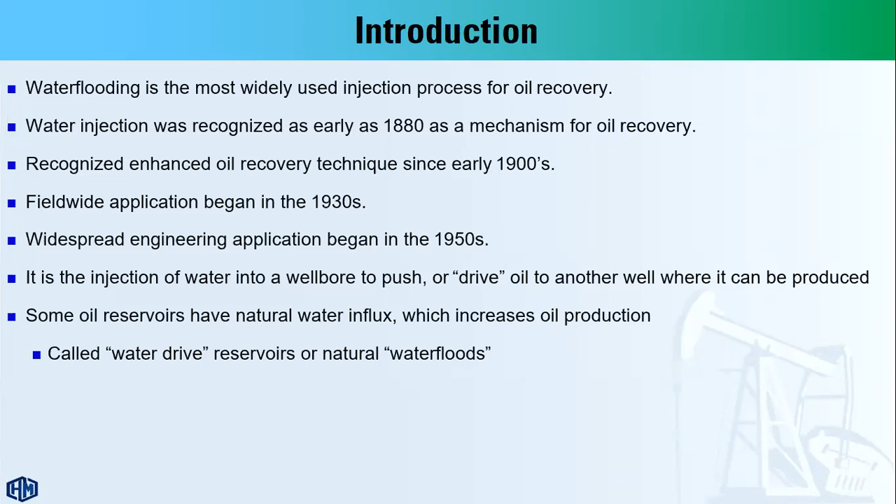At first, I'd like to highlight the difference between primary, secondary, and tertiary recovery operations. Primary recovery is typically based on natural reservoir energy, from different sources like expansion and release of solution gas, influx of aquifer water, and expansion of the gas cap. Primary recovery typically recovers up to 30% of the original oil in place, and production may occur by natural flow without any supplement in the wellbore or even artificial lift.

The secondary recovery technique is the application of the immiscible displacement process, like water injection or water flooding operation and gas injection operation. The estimated oil recovery is from 30 to 50% of the original oil in place.

The third part is tertiary recovery, or enhanced oil recovery. In this case, we have different techniques that work to change reservoir rock or fluid properties, like thermal operations - steam injection, hot water, and in situ combustion - that increase the temperature of the reservoir. Chemical enhanced oil recovery operations like surfactants work to reduce the oil-water interfacial tension. Polymer flooding aims to control the mobility of the injected water. We also have miscible displacement like CO2 injection operation, and additionally microbial enhanced oil recovery operations.

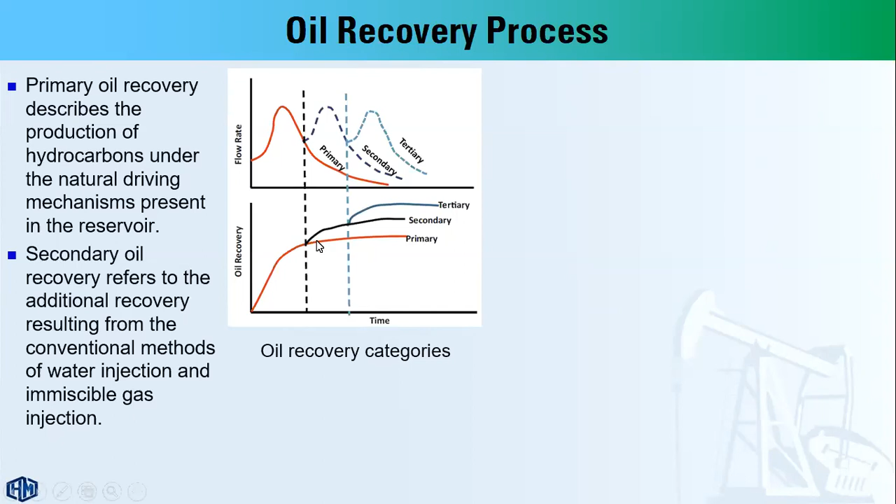As you can see, the oil recovery versus time has added value due to secondary and tertiary recovery. In terms of oil viscosity, for light oil we have up to 25% of the original oil in place that can be recovered by primary oil recovery techniques.

Up to 30% can be recovered by secondary recovery, and the remainder can be recovered by enhanced oil recovery operations. On the other hand, for heavy oil, we have only up to 5% of the original oil in place recovered by primary recovery operations, without any support from external sources to support the reservoir pressure.

For secondary recovery, we have an additional 5% of the original oil in place, while about 90% of the original oil in place can be recovered by enhanced oil recovery operations.

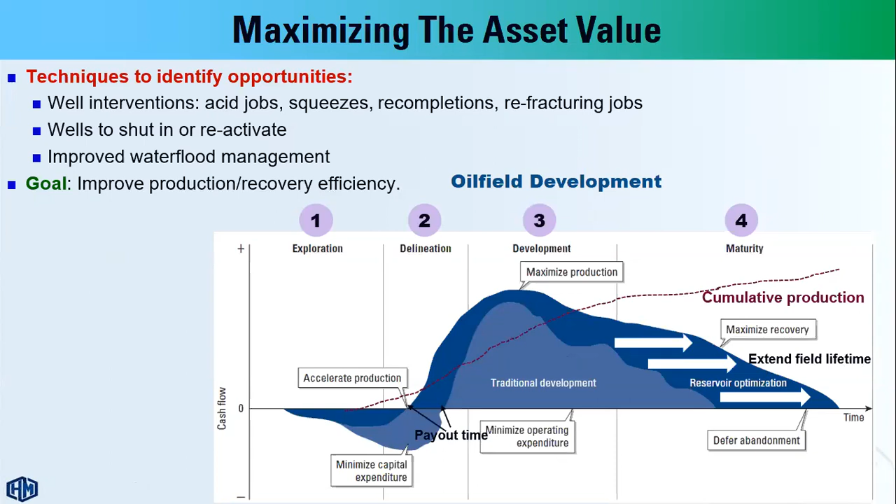After that, within the maturity phase, we have to work to extend the oil field lifetime by different reservoir optimization operations, like water injection or water flood operations.

After that, the water is diverted to water treatment. Within water treatment, for very high volumes of water, the water may be diverted to water disposal or water injection. So water is available throughout the entire oil field lifetime and entire oil field operations and cycle.

We have water during production. Within the subsurface reservoir, the oil is swept and displaced by water, maybe naturally, like water aquifers, or artificially, like water injection.

At specific levels, water may present a problem at surface with higher volumes of water produced with oil. In this case, the surface water treatment system may be overloaded. The water may be subject to water disposal and water injection after proper and specific water treatment on the surface facilities.

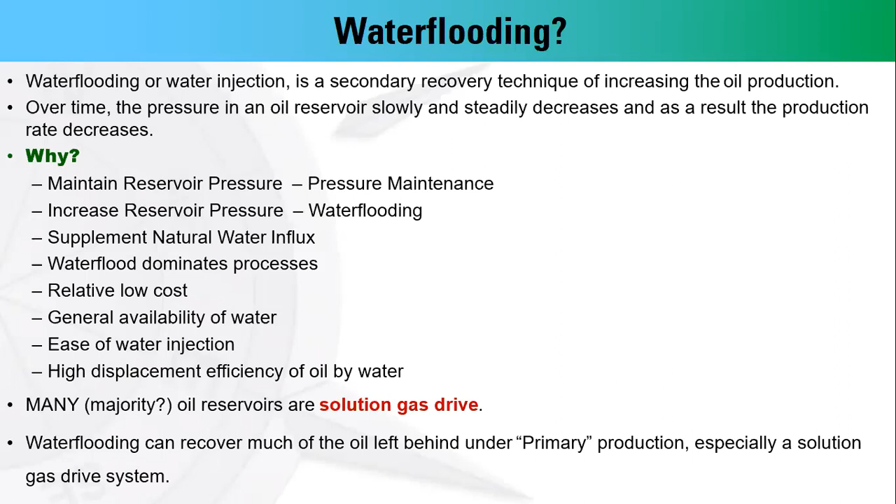One of the main reasons for the dominant application of water injection is the availability of water, the relatively low cost of water injection compared to other techniques like chemical or enhanced oil recovery techniques, the ease of water injection, and the high displacement efficiency that can be achieved by water injection.

Typically, the main objective of water flooding is to support the average reservoir pressure as a pressure maintenance operation, and to displace or push the remaining oil towards the oil production wells. And one of the very important reasons for water flood is...

...to eliminate gas releasing out of the liquid, because once the average reservoir pressure declines below the saturation pressure or bubble point pressure, the solution gas will start to release out of the liquid phase. In this case, the gas saturation in the pore spaces starts to increase.

Once the gas saturation is higher than the critical gas saturation, the gas in the pore spaces will start to move. So we will have simultaneous flow of oil and gas, two-phase flow in the porous media. So the relative permeability of oil will decrease. We have to eliminate more gas released within the porous spaces to avoid any reduction of the effective or relative permeability of oil within the porous media.

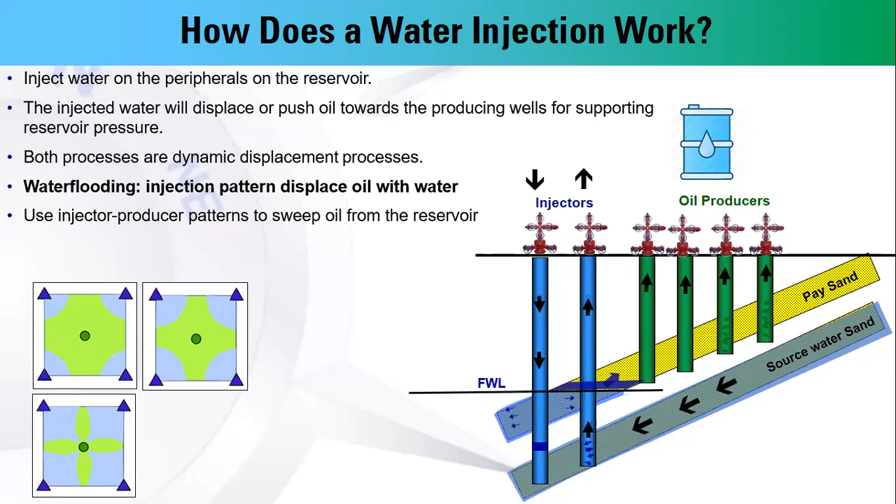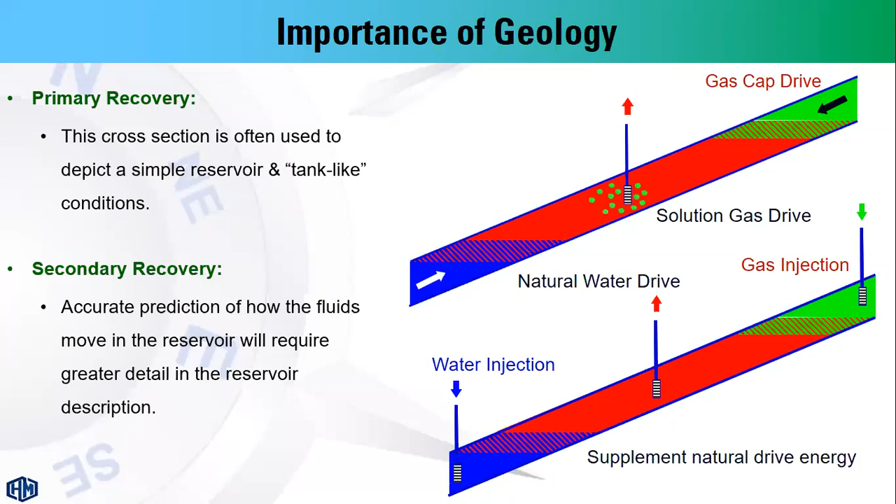However, in actual field cases, the achieved recovery factors are much less than the expected recovery factors due to different parameters like the reservoir heterogeneity, reservoir extension, other parameters like the release of solution gas, the optimization of production operations, and so on.

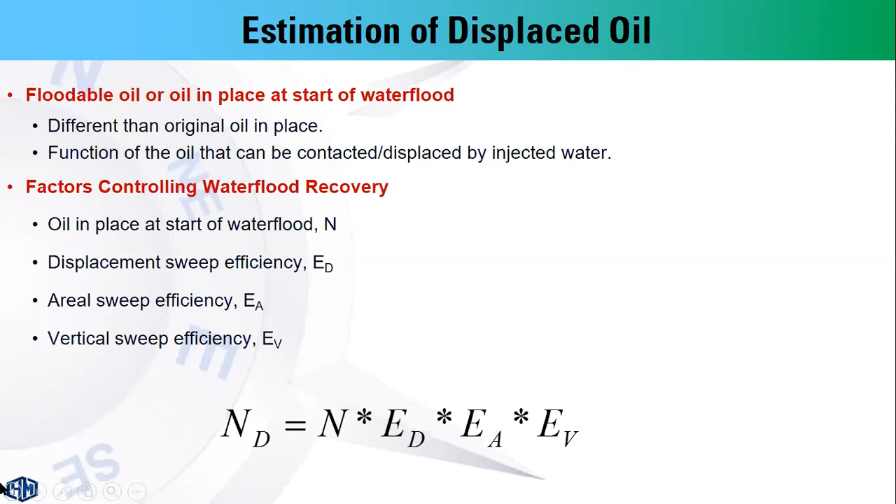So the estimation of the displaced oil, as you can see, this equation can be used to calculate how much oil in place can be recovered by displacement through water flooding operations. It's typically dependent on the original oil, the oil in place at the start of water flood, which is N, and we have three different indicators for water flood performance: the displacement sweep efficiency E sub D, areal sweep efficiency E sub A, and vertical sweep efficiency E sub V. So water injection or water flooding operation is typically dependent on the sweep efficiency and oil in place at the start of water flood.

So, very specifically, the parameters that control water flood recovery: first, the oil saturation at start of water flood, or S sub O, the residual oil saturation to water flood, how much connate water we have, free gas saturation which is a very critical parameter for water flooding operations, and water flood pore volume, which is related to the oil in place at start of water flooding.

The most important fluid properties are the viscosity of oil and water, and also the rock and fluid properties, the effective permeability to oil at the irreducible water saturation, KO at SWI, and relative permeability to water. Another important factor is reservoir stratification and permeability variation, or the Dykstra-Parsons coefficient, water flood pattern, and injection rate. Another fluid and PVT parameter is the oil formation volume factor, and finally the economic considerations.

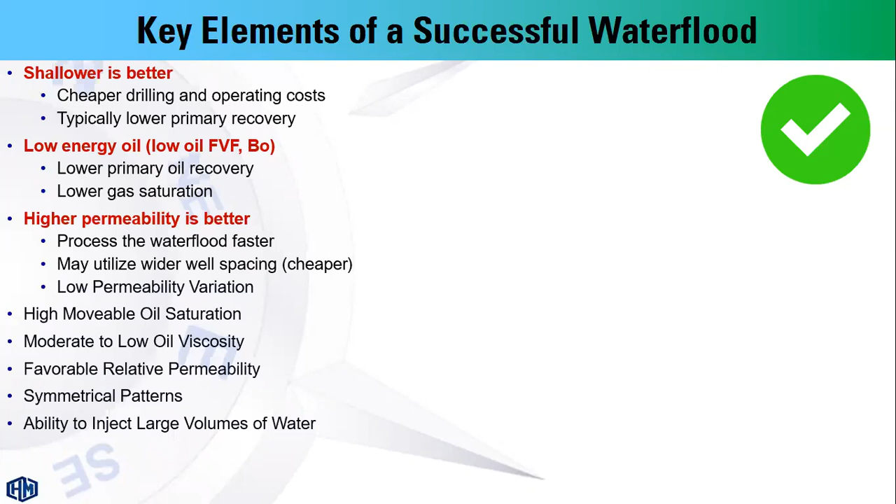High reservoir permeability is better for water flooding operations because in this case we have low permeability variations, and we may use wider well spacing, which is cheaper in terms of number of injection wells, and also moderate to low oil viscosity.

The first important aspects related to water flooding are the geological aspects. Most important is to ensure low reservoir heterogeneity, or permeability contrast, between different reservoir units or reservoir layering. Anisotropy is also a critical aspect to water flooding, related to vertical and horizontal permeability variations, typically related to the depositional environment of the subject reservoir.

Drainability, which is related to the production by primary depletion, is an indicator for the success of water flooding operations.

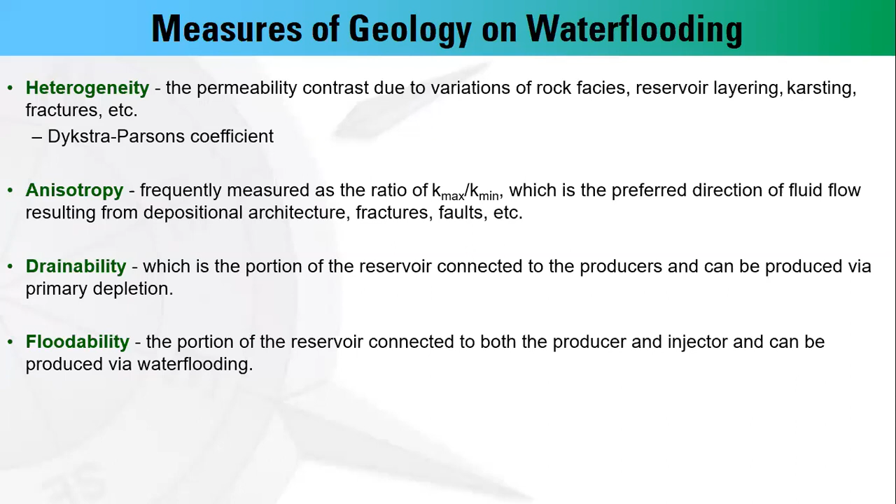To summarize, for successful water flood, we have to have a sound and good understanding of the geological models to understand the reservoir complexity and heterogeneity. Also, in this model, this is the channeling system, so you have to ensure communication between the specific channels that will have injectors or producers to control the average reservoir pressure.

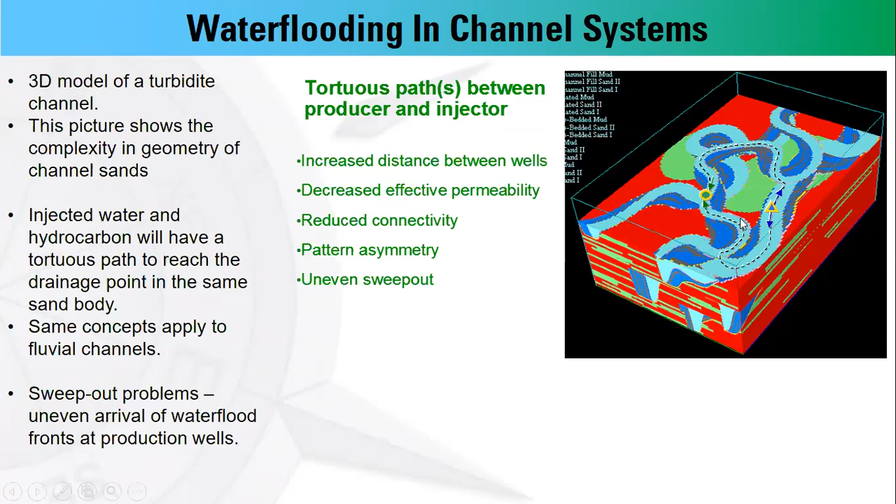Now, the important reservoir rock aspects — the most important is the relative permeability data. At the beginning, let's define the reservoir rock permeability, or absolute permeability, as defined by Darcy's law. It's a rock property related to fluid flow. The permeability is typically directional; we have the three terms of permeability in X, Y, and Z. The permeability in the vertical direction is typically less than the horizontal permeability.

The absolute permeability is defined at 100% saturation of the reservoir rock with a specific or single fluid. So the absolute or specific permeability is the ability of this rock to transmit this fluid at 100% saturation, or the fluid conductance capacity of the porous media. It's defined according to this equation in oil field units.

For the effective permeability, in this case we have more than one fluid in the pore space. So the effective permeability is the permeability to a particular fluid, in case the porous media is saturated with more than one fluid, like oil and water, or even oil, water, and gas phases. The applications of relative and effective permeability data are typically reservoir simulation and all fluid flow calculations that include multi-phase flow equations or multi-phase flow applications in the reservoir. So in this case, we have to apply the effective and relative permeability definitions.

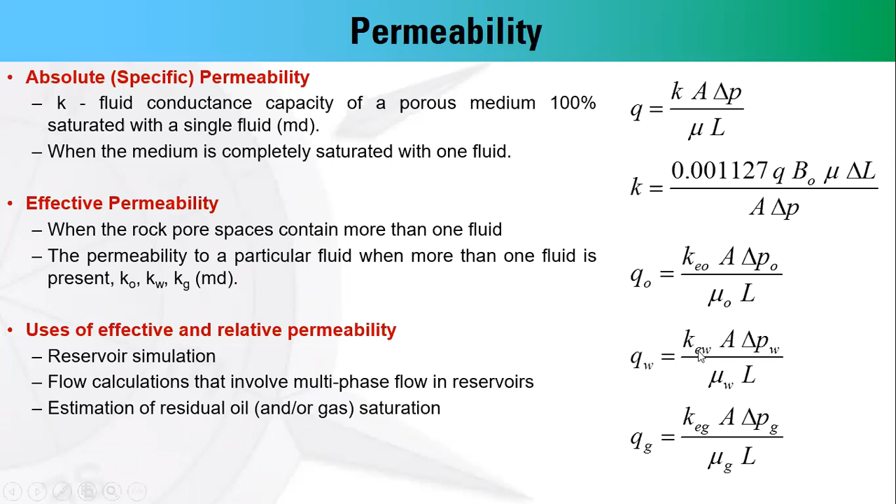So this is the definition of the effective permeability to oil, water, and gas, as defined by Darcy's law.

So relative permeability refers to cases where we have two or more fluids flowing simultaneously within the porous media at the same time. Relative permeability is defined as the ratio of the effective permeability to a particular fluid at a given saturation to a base permeability. There are two common base permeabilities: the first is the absolute or air permeability, and the second, more commonly used, is the effective non-wetting phase permeability at irreducible wetting phase saturation. In other words, it is the effective permeability of oil at irreducible water saturation, KEO, at the value of SWI.

This is the typical shape of a water-oil relative permeability curve. As water saturation increases in this direction, the relative permeability to water increases from irreducible water saturation to reach KRW at SOR. In the opposite direction, as oil saturation increases, the relative permeability to oil increases from this point to reach 100%, or one, at irreducible water saturation. This means the base permeability in this case is the effective permeability to oil at SWI, so at this point the relative permeability to oil equals 1 or 100%.

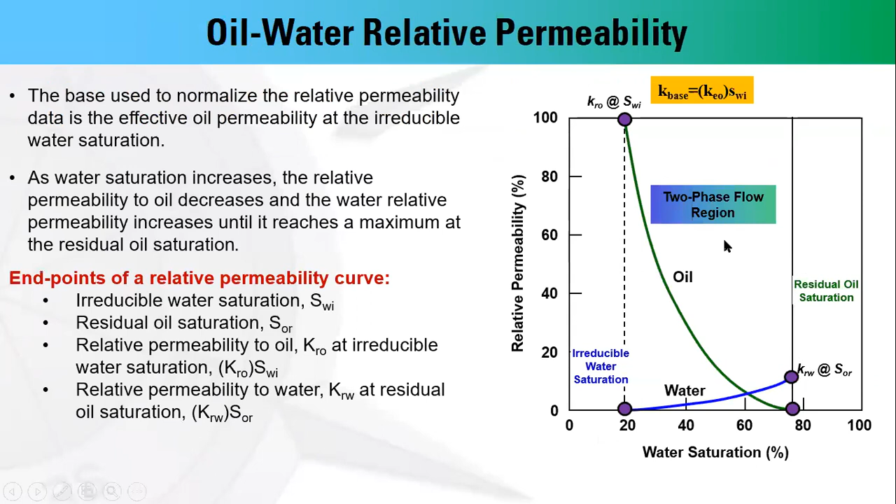You have to know that there are different endpoints for any relative permeability curve, typically four endpoints. The first is irreducible water saturation, SWI, and residual oil saturation, SOR. For relative permeability, we have relative permeability to oil at SWI and relative permeability to water at SOR. Within this region we have single phase oil flow, and within this other region we have single phase water flow, while in between we have the two-phase flow region.

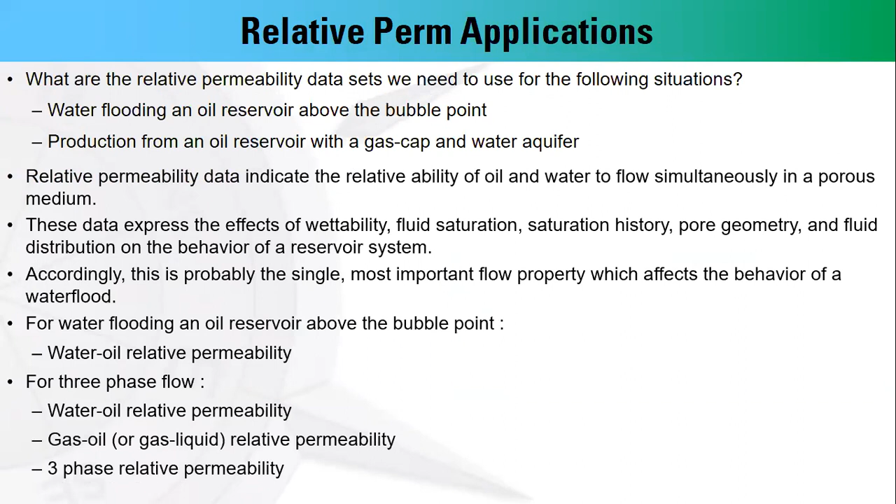Relative permeability data has applications in any multi-phase flow calculations in the reservoir, and typically for water flooding operations we have to use water-oil relative permeability curves.

The factors affecting relative and effective permeability data are fluid saturation and pore geometry, rock wettability, and fluid saturation history in terms of imbibition and drainage.

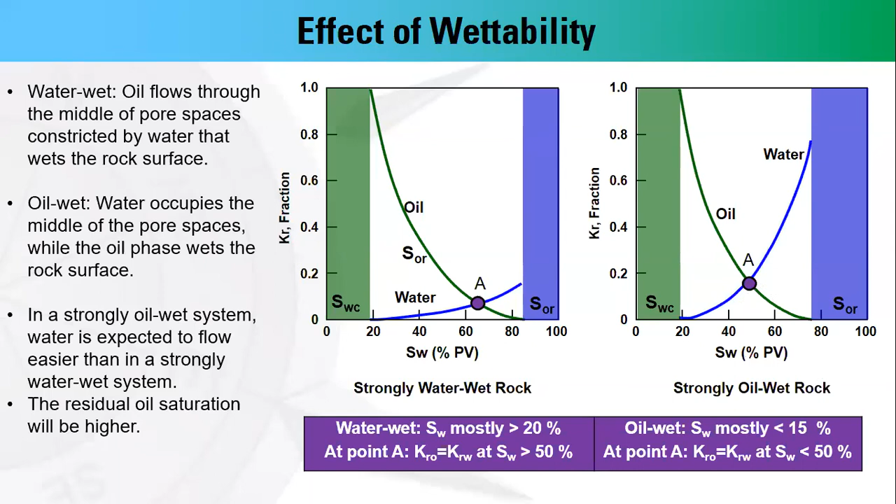For drainage, we have an increase in the non-wetting phase saturation, so the wetting phase saturation is decreasing. This is a simulation process for the migration of oil through a gas cap into the reservoir. As you know, all reservoirs are initially saturated with 100% water, so during migration, the oil or gas will displace the water to form a drainage process.

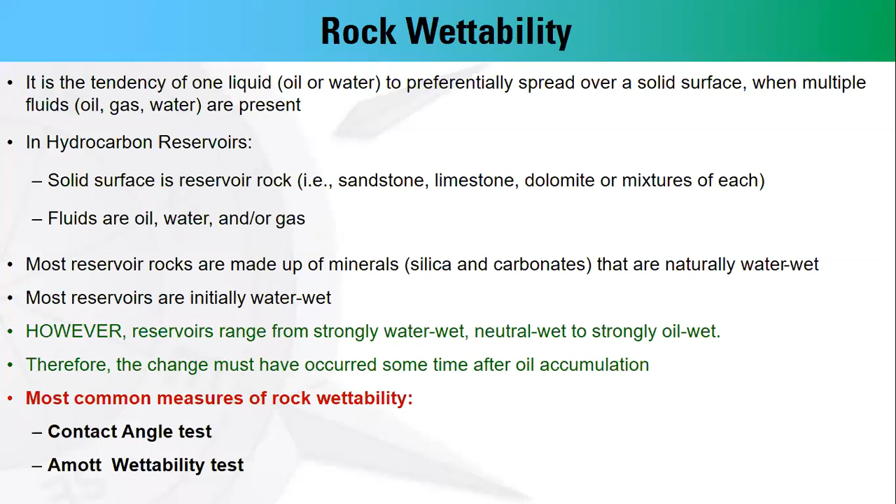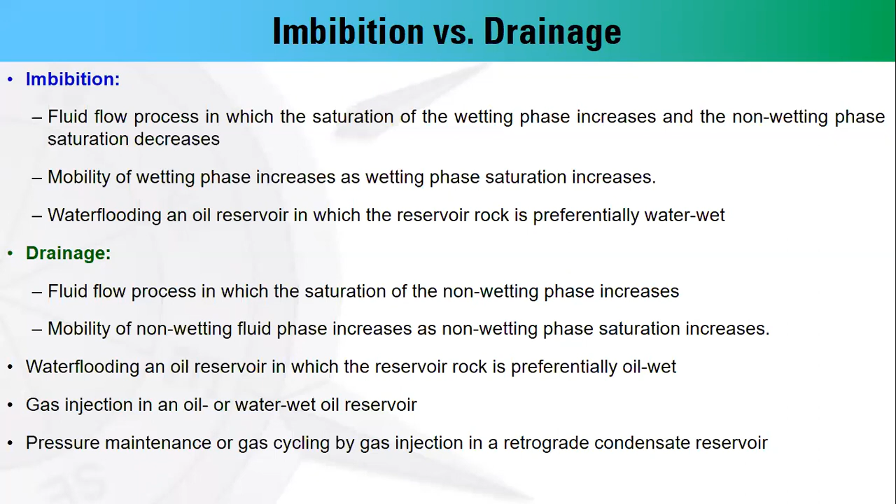As mentioned before, we have two different techniques. We have imbibition, like water injection or water flooding operations in oil reservoirs, in case the reservoir rock is water-wet, where we have an increase in the wetting phase saturation, or increase in water saturation. On the other hand, the drainage process is the increase in the non-wetting phase saturation, like gas injection in an oil or water-wet oil reservoir.

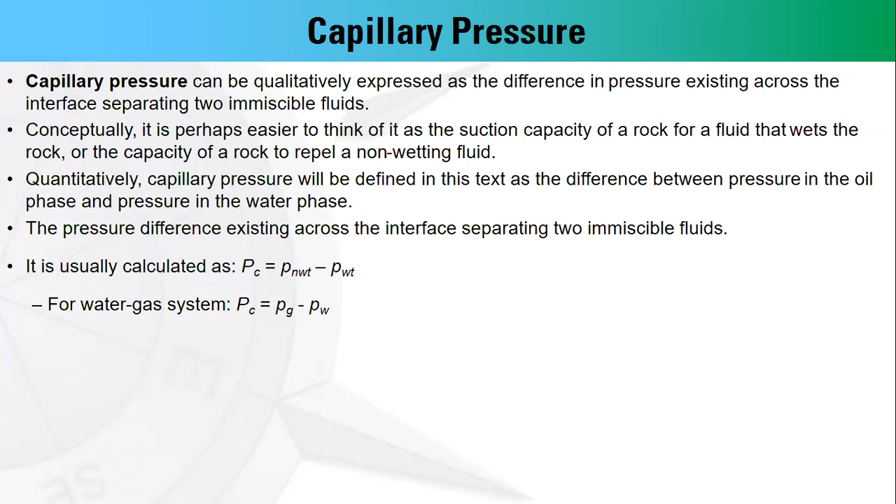The last important rock property is the capillary pressure. The capillary pressure is the pressure difference existing across the interface separating two immiscible fluids, like water and oil. By definition, the capillary pressure is the pressure in the non-wetting phase minus the pressure in the wetting phase.

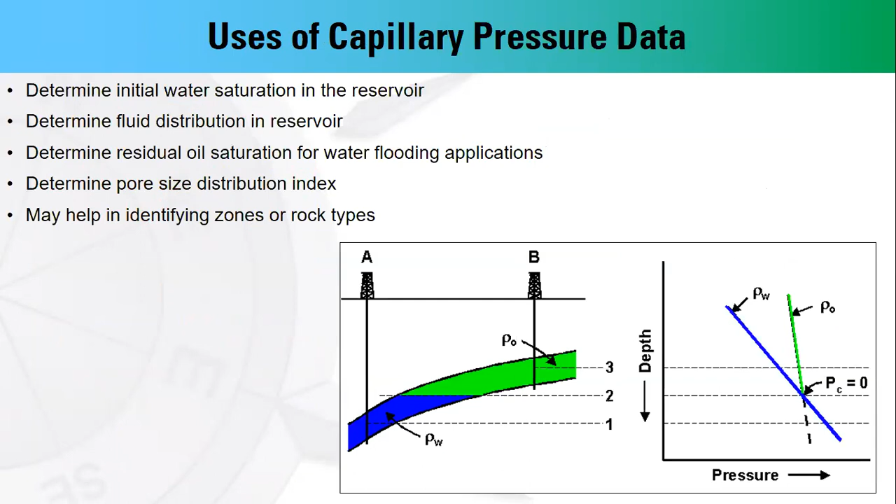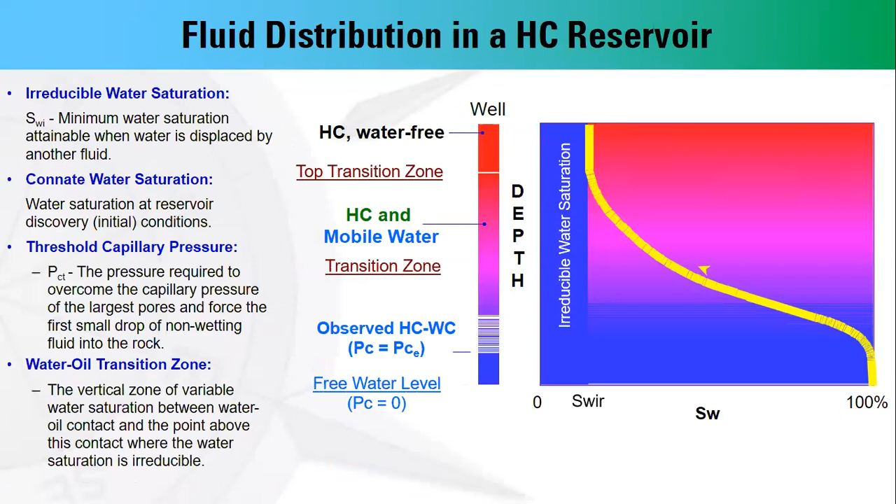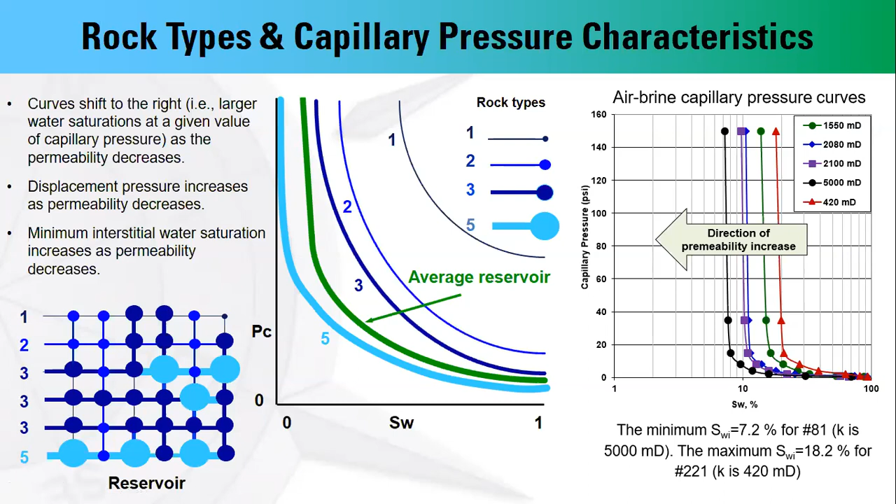So for averaging the capillary pressure data, we have a very important technique, the Leverett J function. J function is typically a technique to develop a universal capillary pressure curve. It's a dimensionless function that relates the capillary pressure with reservoir rock and fluid properties. This is the definition of the J function: it's related to the capillary pressure, porosity and permeability, and the interfacial tension and contact angle between the fluid and rock surface.

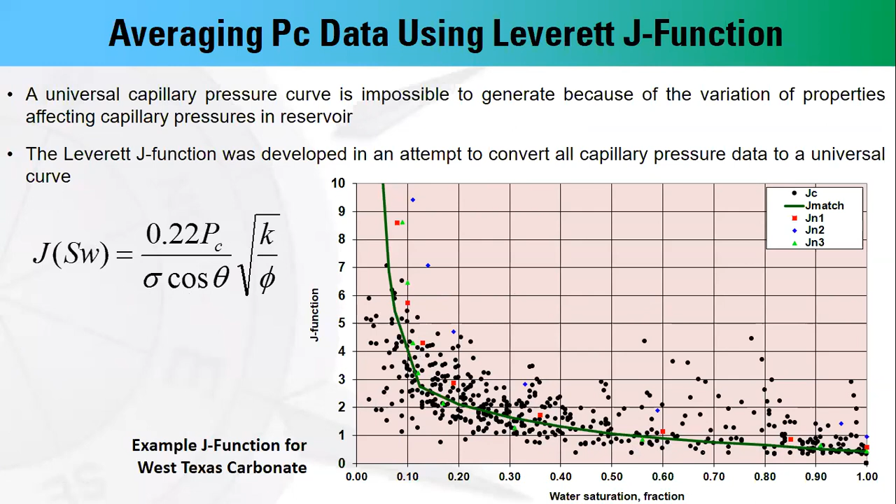Just as a summary for capillarity and wettability effects: capillarity is typically dependent on the interfacial tension between oil and water, wettability effects, and pore throat size distribution. So a larger pore throat size gives a lower capillary pressure and a smaller water-oil transition zone.

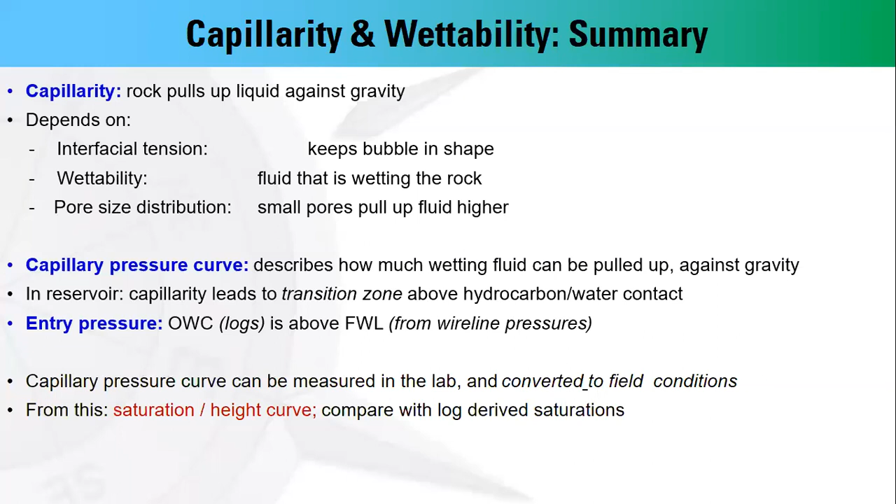Now I'd like to highlight reservoir heterogeneity. Reservoir heterogeneity is related to the distribution of reservoir properties laterally between injectors and producers. In water flooding, you have to avoid any structural elements like sealing faults between the injector and producer. So if we consider water injection from this well in layer 5 and layer 6, the oil producer will not be affected by the injected water because we have this sealing fault between them.

So for efficient water flooding operation, you have to ensure there are no structural elements, and ensure good lateral distribution of the reservoir between injectors and producers.

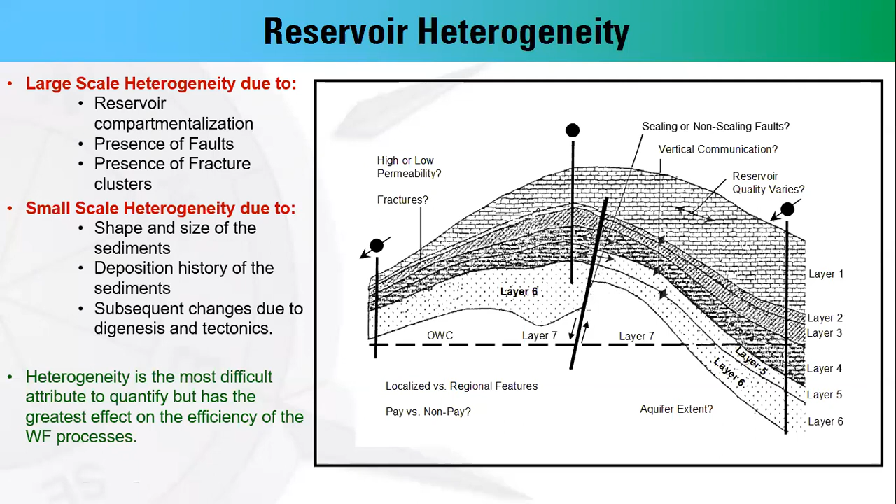So in the layer, there is a variation or heterogeneity between layers. So we have two different techniques to identify the permeability variations. The important one is the Dykstra-Parsons coefficient, used to identify the permeability variation before designing a water flooding operation. And the second is the Lorenz coefficient of heterogeneity.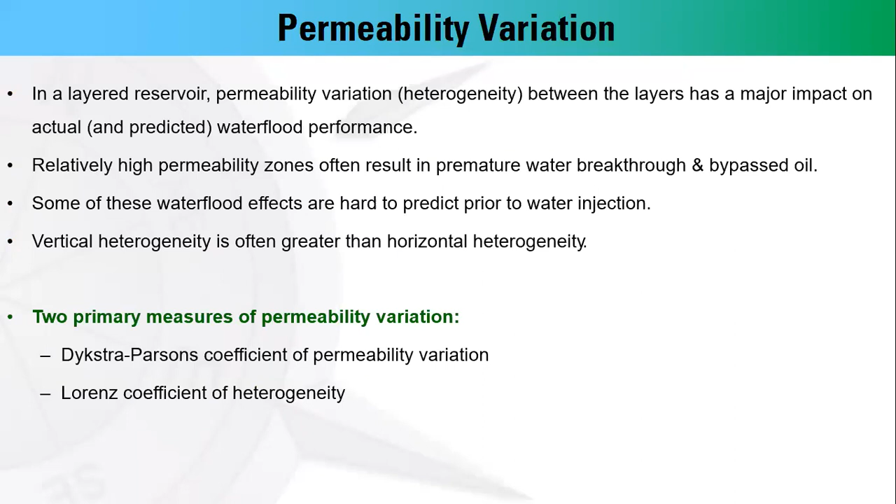I will highlight very quickly the Dykstra-Parsons coefficient of permeability variation. It's defined by this equation, a function of permeability at K50 and K84.1. K50 is the median permeability value at 50% of the cumulative sample distribution. So the procedure is to sort your permeability data in decreasing manner and calculate K50 and K at 84.1% of the cumulative sample distribution.

In this case, you will find a relationship like this, and according to this relationship, we identify the permeability variation. The Dykstra-Parsons coefficient ranges from 0 to 1, or 0 to 100. A value of 0 means we have a completely uniform or homogeneous reservoir, while values at or near 1 indicate a completely heterogeneous reservoir, which is not recommended for water flooding operations.

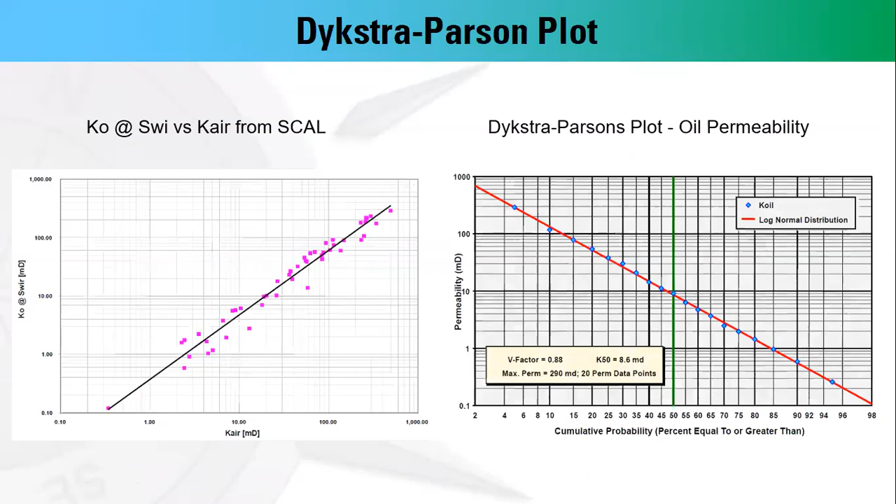Now the definitions of mobility and mobility ratio. Mobility is simply the ratio of effective permeability to the viscosity of a specific fluid. So mobility is the permeability of the rock to a specific fluid relative to the fluid viscosity.

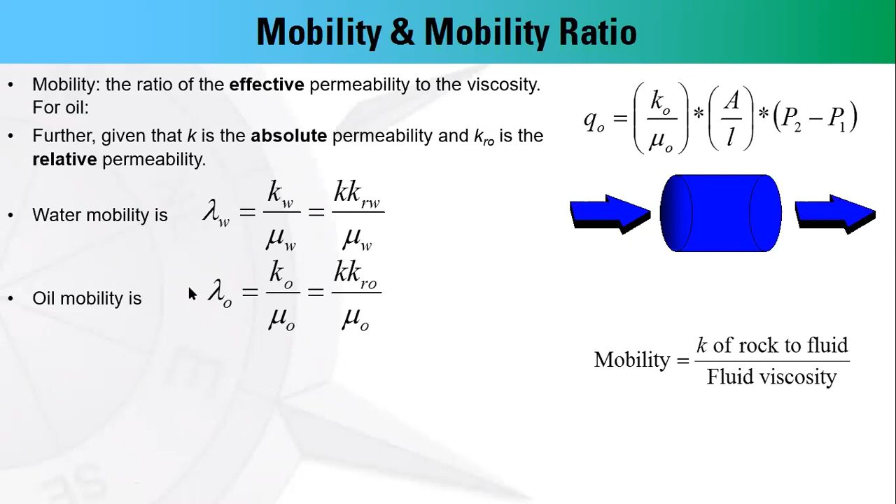Typically, we have this definition of mobility of water and oil. This is the mobility of water: the ratio of kW over mu w. In terms of effective permeability to water, it can be represented by K absolute times krw, the relative permeability to water. For oil, we have a similar definition of oil mobility.

So mobility is a very critical parameter for successful water flooding operations. We have to ensure we have lower water mobility and higher oil mobility.

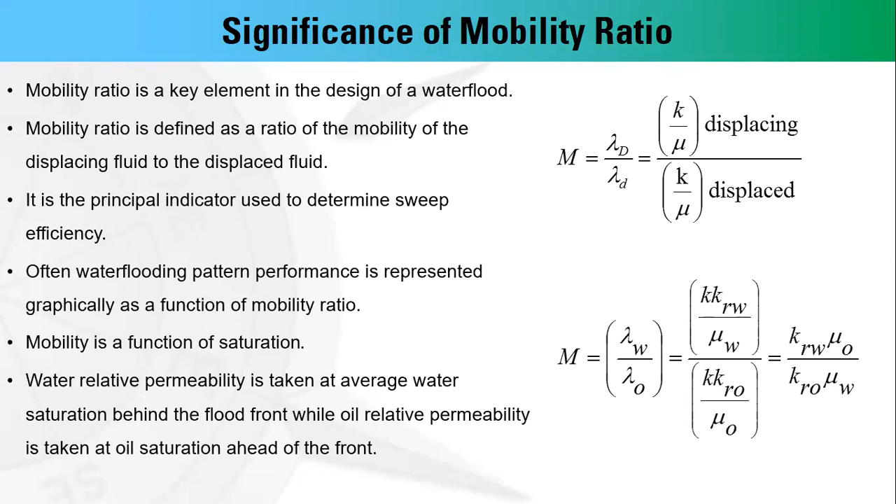The second important definition is the mobility ratio, simply the ratio of mobility of the displacing phase to the displaced fluid, or the mobility of water to mobility of oil. It follows this definition. For water flooding, it's important to keep the mobility ratio less than 1 to ensure efficient water flood and higher oil recovery.

For mobility ratio higher than 1, we have an unfavorable mobility ratio. In this case, the water will move more easily in the reservoir relative to oil, which is not recommended in water flooding operations. In this case, we may apply polymer flooding operations to control the mobility of water, while for mobility ratio less than 1, which is a favorable mobility ratio, the oil will flow more easily than the formation water. This is highly recommended in water flooding operations to ensure maximum oil recovery and delay water breakthrough.

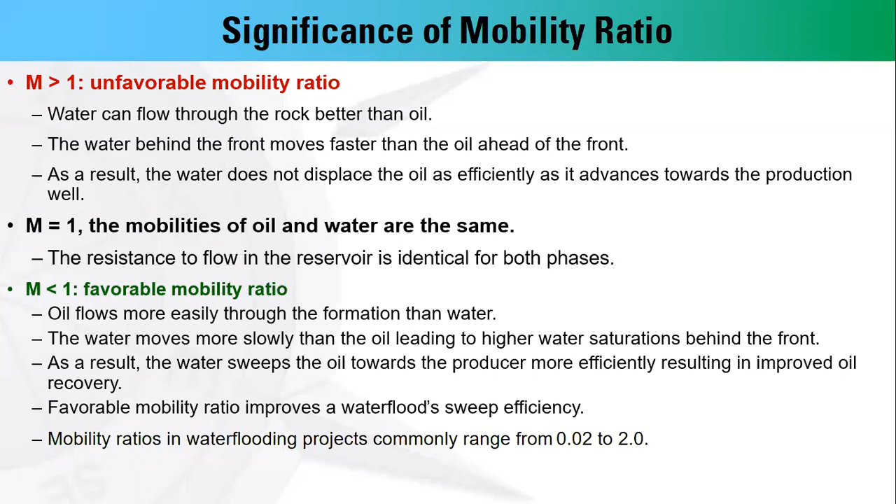For the recovery process, typically in field operations, we have 5 different reservoir driving mechanisms: solution gas drive, gas cap drive, water drive, combination drive, and gravity drainage. We have different sources of reservoir energy, like expansion and release of solution gas, expansion of gas cap gas, influx of aquifer water, and even gravity effects on recovery.

So the optimum solution is to combine depletion with displacement, like combining solution gas drive with water injection. In water injection, we have two different scenarios: pattern flood and down-dip peripheral injection.

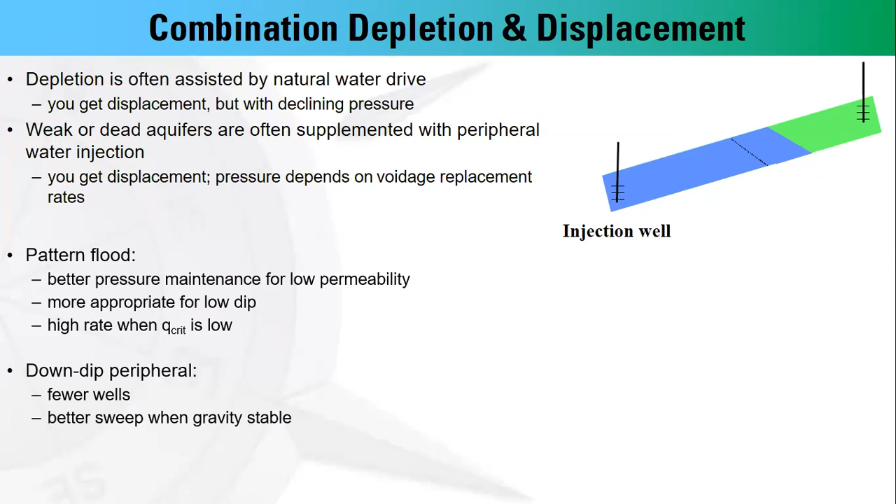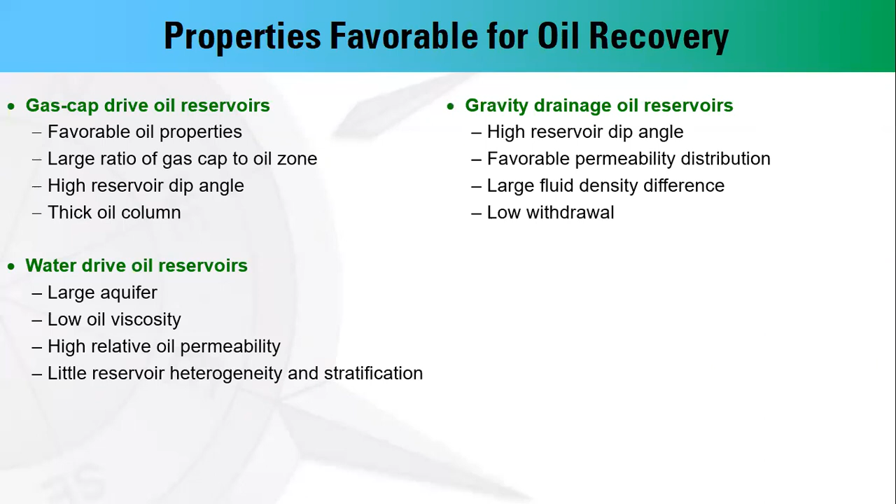The favorable condition for maximum oil recovery in gas cap drive reservoirs is a large ratio of gas cap to oil zone, or a large gas cap size. For water drive, a large or strong aquifer is preferred to maximize oil recovery; in this case, water flood operations may be neglected due to higher reservoir energy. For gravity drainage, high dipping in the reservoir is favorable, and a large density difference between oil and water is also recommended to maximize recovery by gravity drainage.

So the common negative factors related to water flood include low production rates related to low reservoir pressure or energy, and poor hydraulic conductivity, which also affects injection. Another negative issue is early water breakthrough, related to high permeability contrast between reservoir layers. Also, corrosion, scaling, and plugging problems related to water injection operations are among the negative issues related to water flood.

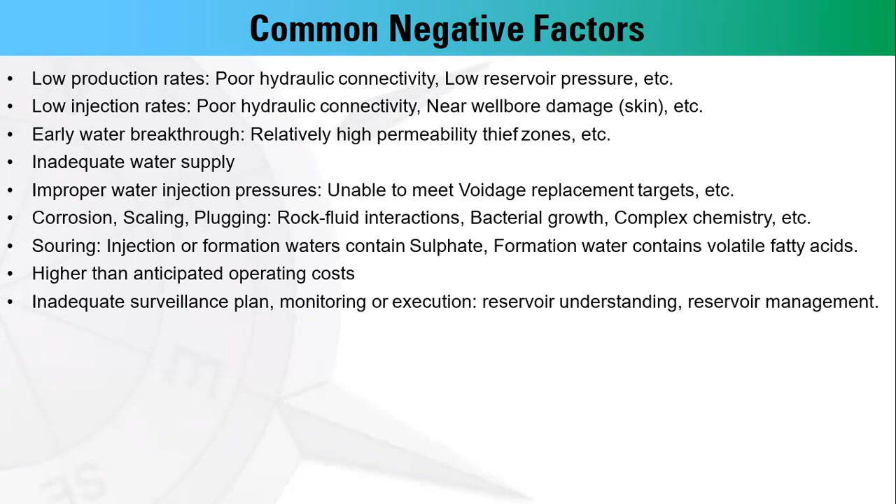So, however, we have different negative issues of water flood. The water flood is the most widely used secondary recovery technique.

Now, I will highlight the definition of the voidage replacement. The voidage replacement or voidage replacement ratio is the ratio of injection to production for a specific pattern or even throughout the field wide.

The reservoir voidage is the summation of reservoir oil, water and gas production calculated at reservoir conditions. In this case, we have to consider the free gas production if the average reservoir pressure is

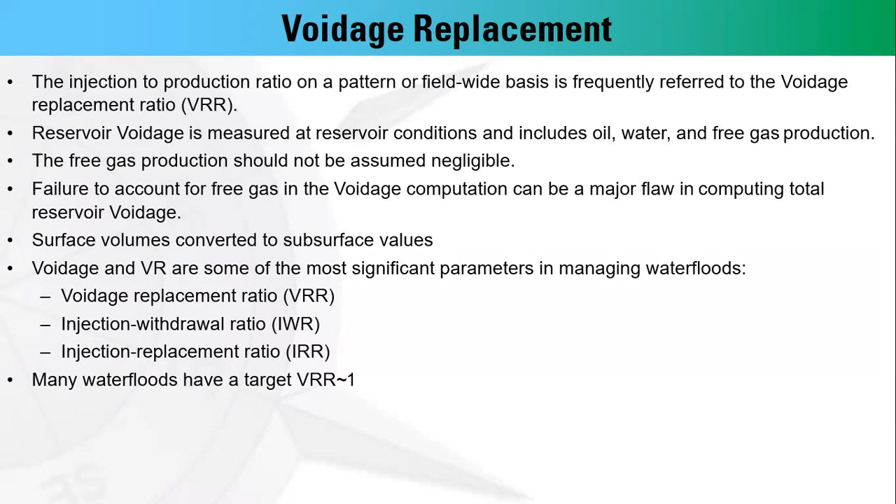lower than the saturation or bubble point pressure. So the voidage replacement ratio is the summation of water injection, or even water influx, divided by the reservoir voidage. The reservoir voidage is defined by this equation: oil plus water plus free gas production converted to reservoir conditions by multiplying by the formation volume factor of oil, water and gas.

So the voidage replacement ratio is the ratio of the total water injection to the total reservoir voidage. In successful water flooding operations, it's important to keep the voidage replacement ratio higher than 1 to keep the average reservoir pressure more or less constant, while for a voidage replacement ratio lower than 1,

in this case the reservoir pressure will steadily decline due to depletion in the average reservoir pressure.

Typically, we have different reasons for pressure losses during water injection due to reservoir heterogeneity, due to solution gas or free gas fill up, poor communication between zones, poor sealing, and even leakage faults. In this case, we will have losses in the injected water.

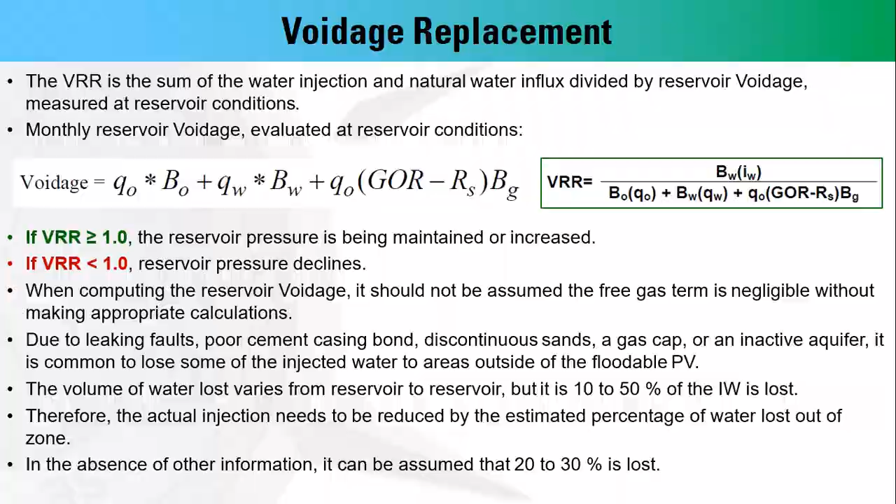And now I will highlight the immiscible displacement process in a porous media. So water flooding operation is typically an immiscible displacement process.

It's typically governed by three fundamental concepts, starting with the fractional flow equation developed by Leverett in 1941. The second one is the frontal advance equation developed by Buckley and Leverett in 1942. The tangent method of analysis of the fractional flow curve was developed by Welge in 1952.

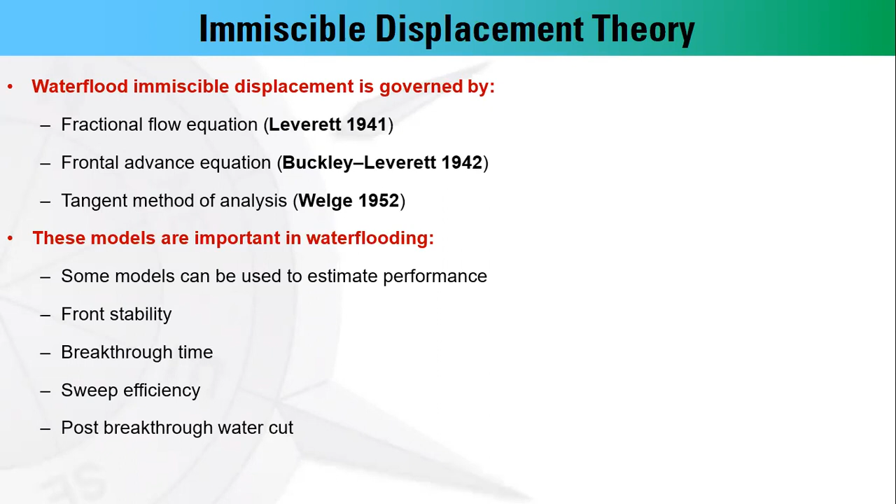So these are the fundamentals of immiscible displacement and applications of water flood. They are used to identify the front stability and breakthrough time, and even the sweep efficiency of water flooding.

So this is the definition of fractional flow. It's an important model used to identify the water fraction relative to the total flow at a particular location and time in a linear reservoir model or water flood system.

So the fractional flow, as you can see, is a function of the mobility ratio, mobility, gravity and capillary terms. The fractional flow will provide important insights related to the immiscible displacement process and the water saturation distribution within the water flooded zone.

In this equation, we have two important parameters related to the gravity term, which is a function of the dipping of your reservoir and the difference between oil specific gravity and water, or the density difference between water and oil. The second term is the capillary term, which is related to the capillary pressure effect.

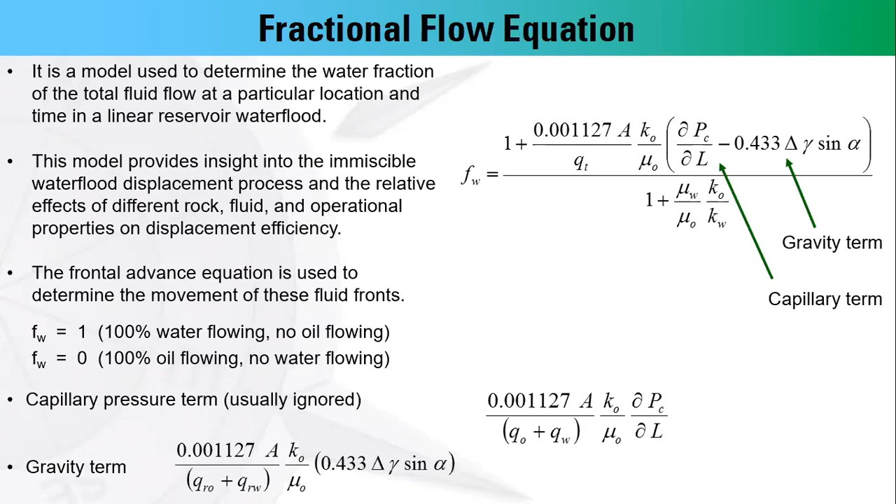Typically for fractional flow of water, if we have a higher fractional flow, in this case we have 100% water flowing in the reservoir, which means no oil flow, which is not recommended in water flooding operations, while a low fractional flow of water or low water cut means efficient water injection or water flooding operations.

So the fraction of water flowing at any point in the reservoir at point X in a linear water flood system is defined by the fractional flow like this.

In terms of the second gravity term, this is a function of the density difference between oil and water, and this form is a function of the specific gravity difference between oil and water.

So the fractional flow is typically a relationship of different fluid properties like viscosity and density, rock properties like effective permeability and saturation, total throughput rate like injection rate, pressure gradient or capillary pressure, and structural property like the dipping of the reservoir, which is the parameter alpha.

So in case we have water injection with updip, this will improve the efficiency of water flooding operation due to the gravity effects.

So this is the flow at any location in the reservoir, defined by this equation. The total reservoir flow is defined by Q oil and Q water. So the fractional flow simply equals Q water divided by Q oil plus Q water, or Q water to Q total. So the fractional flow of water is the fraction of water flowing in the reservoir relative to the total fluid flowing in the reservoir.

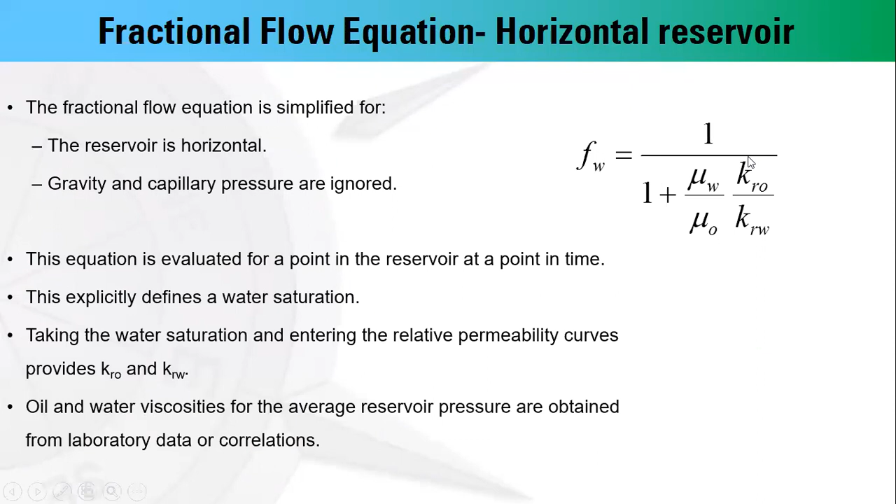This is the simplified form of the fractional flow in case we have a horizontal reservoir, so we have no dipping effect, and by ignoring the capillary and gravity forces. This is the definition of the fractional flow equation.

The different forms of the fractional flow equation can be related to the water-oil ratio according to this definition. So Q water relative to Q total is a function of the water-oil ratio at reservoir conditions. So we have different forms of the fractional flow equation.

The controls of the fractional flow: reservoir dipping is very important. So up-dipping displacement of oil by water, or up-dipping water flood, will improve the efficiency of water flood due to the gravity forces. Also, in case we have a large density difference between water and oil, that will also improve the water flood efficiency.

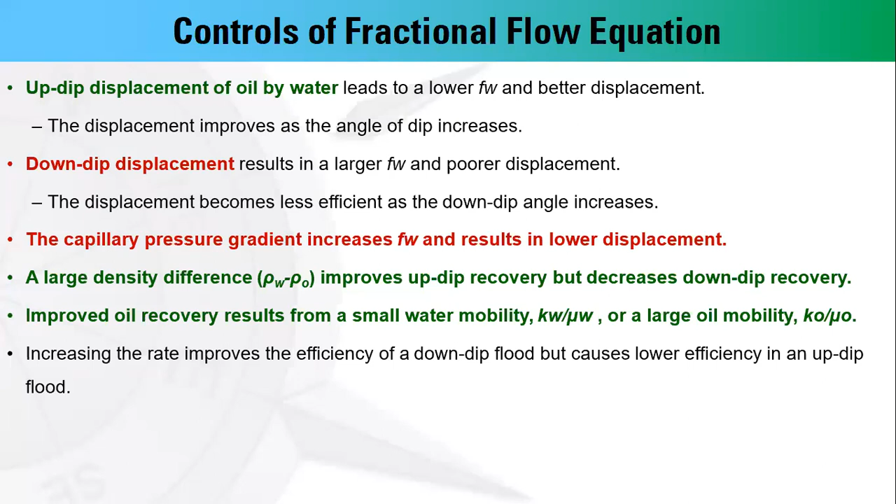Typically, the fractional flow curve is dependent on wettability, dipping, and the oil and water mobilities. With high mobility water, the fractional flow of water will be higher, which is not recommended. Also, for down-dipping displacement versus injecting up-dipping displacement, up-dipping is recommended to improve water flood efficiency and reduce the fractional flow of water.

Also, relative and effective mobility have an effect on the fractional flow, because this equation is simply a function of the relative mobility of oil and water.

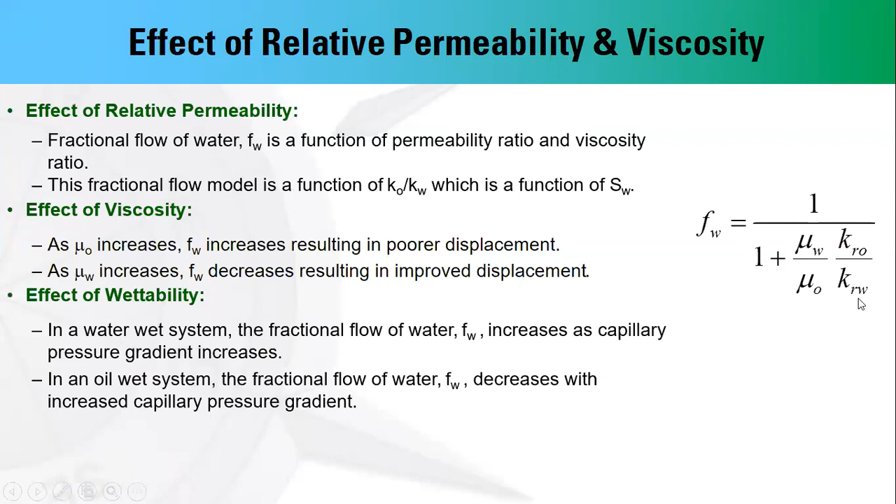The fractional flow is a function of water saturation. It's very simple, and it's related to the relative permeability data as a function of water saturation.

One assumption is that the gas saturation is zero and the connate water saturation is immobile. This is one of the widely and initially used techniques for displacement, the piston-like displacement model. It's a very ideal model.

So the oil saturation at the flood front is the difference between 1 and Swi. Behind the flood front, we have the residual oil saturation in the water-flooded zone. This model is very ideal and very simple to discuss the displacement theory.

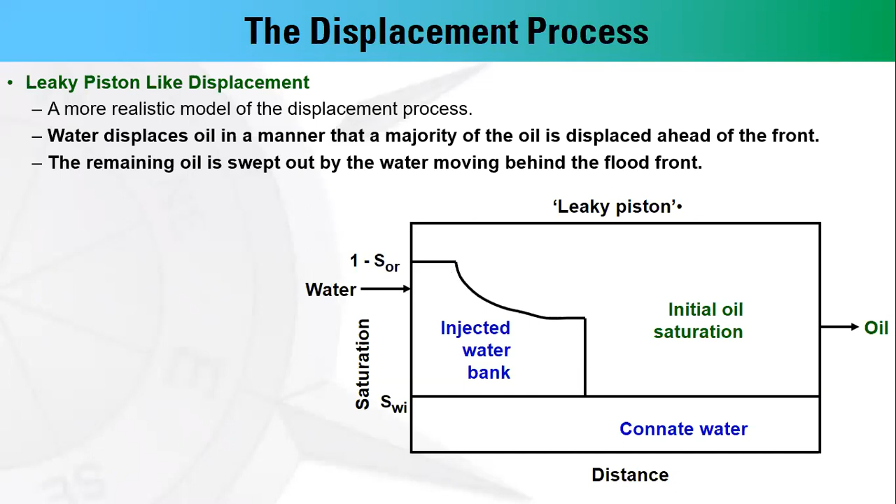It's very related to the actual injection operations. So in this case, water displaces oil in a manner related to the non-uniform water flood front, and the remaining oil is swept by the injected water moving behind the flood front.

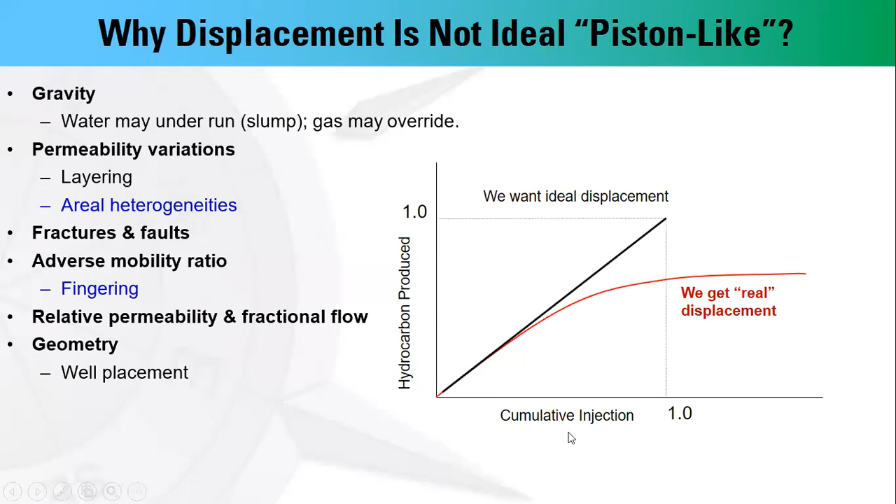So why don't we have this ideal effect? Because we have gravity effects. When we have free gas in the reservoir, permeability variations, or areal heterogeneity, we may have fingering of the lower, higher mobility water. Also, the relative permeability and the fractional flow will not be as homogeneous. So this is the ideal displacement process, while this is the actual displacement process, as a relationship between hydrocarbon recovery relative to the cumulative bulk volume of water injected.

So the next important definition is the frontal advance equation. This equation is important to identify the saturation distribution of different phases at any time during water flooding. The frontal advance equation is used to calculate the water saturation in the water-invaded zone of the linear system or the subsurface reservoir.

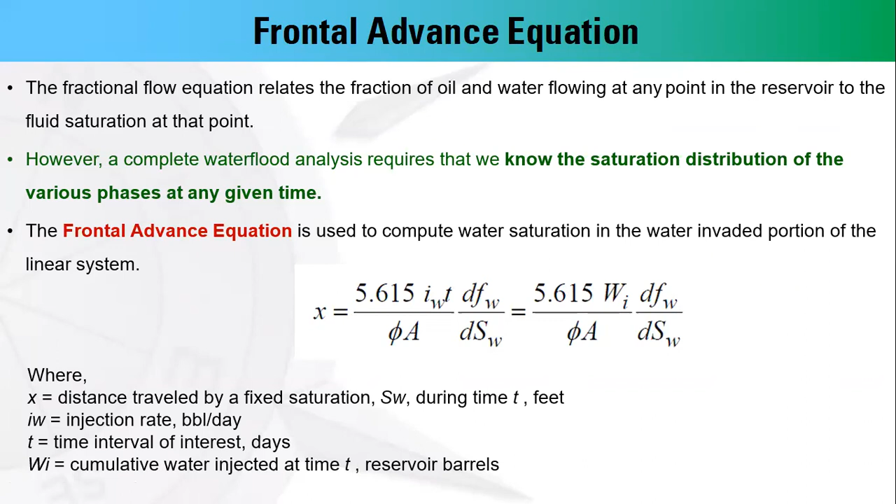This is the definition of this equation. So x is the distance from the injector. Water saturation will be calculated at time t and distance x. IW is the injection rate, T is the time interval in days from the start of water injection, and W sub I is the cumulative water injected at calculation time T. This equation is very important to identify the water saturation distribution within the linear displacement system or water flooding operations.

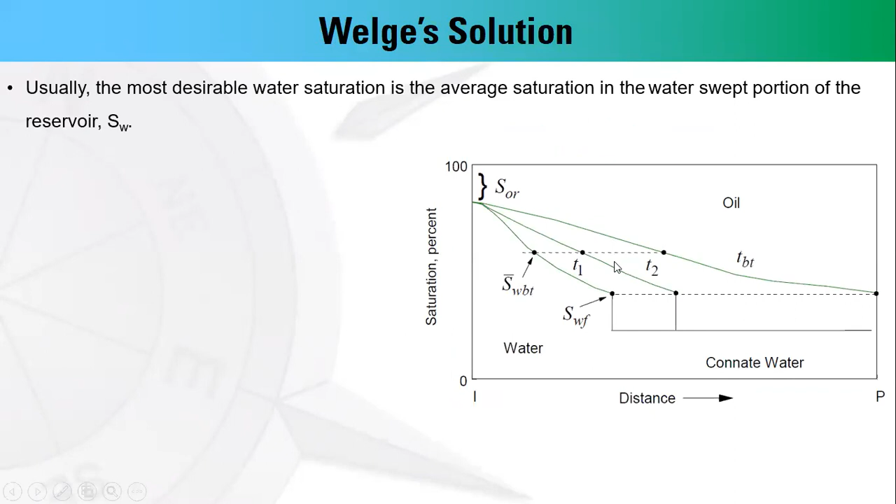So this is the typical saturation distribution for the immiscible displacement process, calculated by the frontal advance equation. At different times, as you can see, this is the shape of the saturation distribution and the location of the flood front at this time, at time one, and at time two, which is the time of breakthrough. As you can see, the flood front is located at the production well.

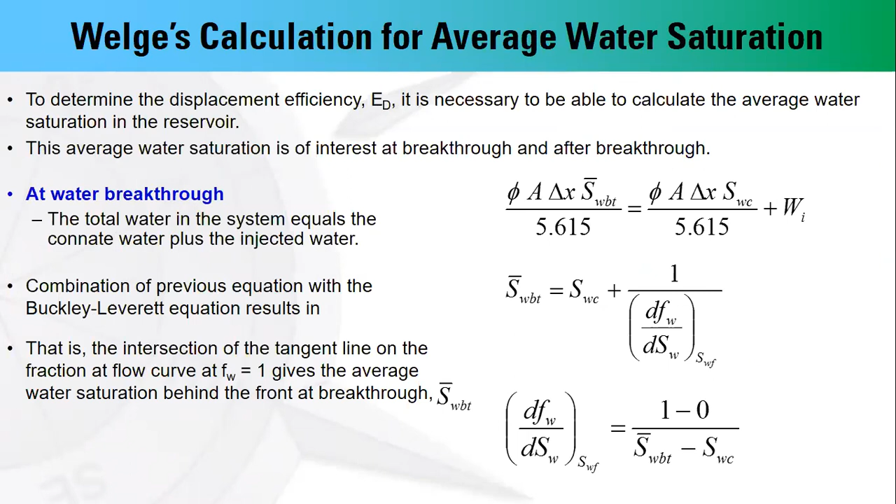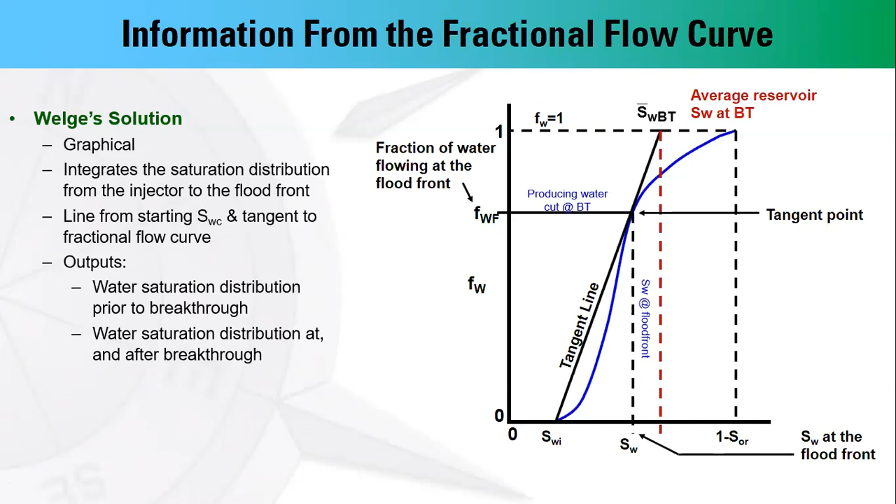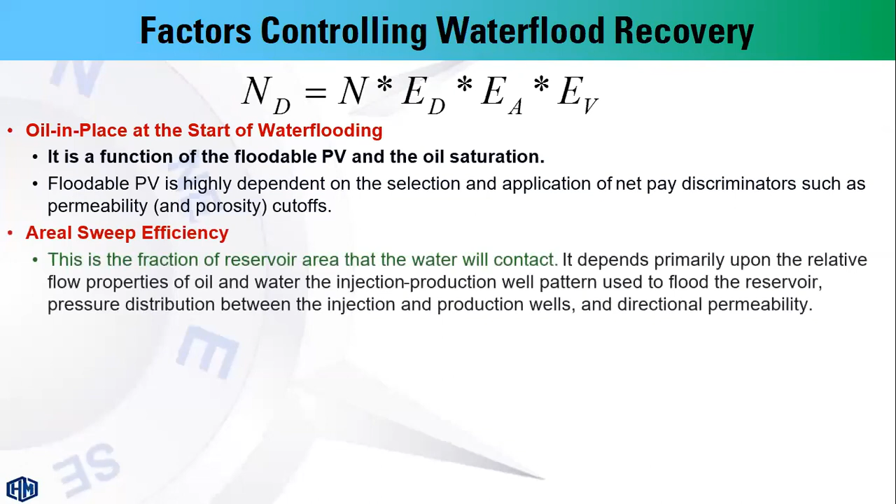Areal sweep efficiency is the fraction of reservoir area contacted by the injected water. Vertical sweep efficiency, if we consider the vertical plane between the injection and production well, so we will calculate the vertical sweep efficiency. The displacement efficiency is the fraction of oil which will be displaced by the injected water.

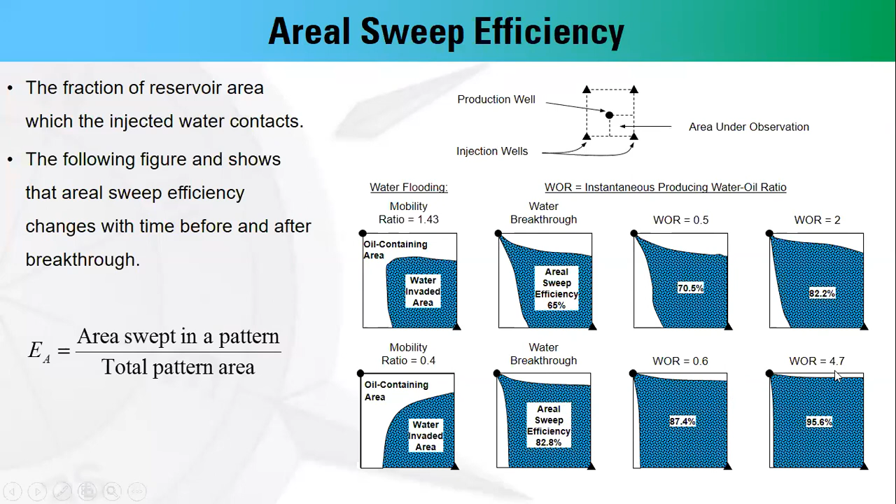For the vertical sweep efficiency, if we consider the vertical plane, the vertical sweep efficiency is the vertical cross section contacted by the injected water. Generally, the water flood efficiency is the cumulative production correlated with the oil in place at the start of water flood and the recovery efficiency of water flood. This term is the areal and vertical times displacement efficiency of the water flood.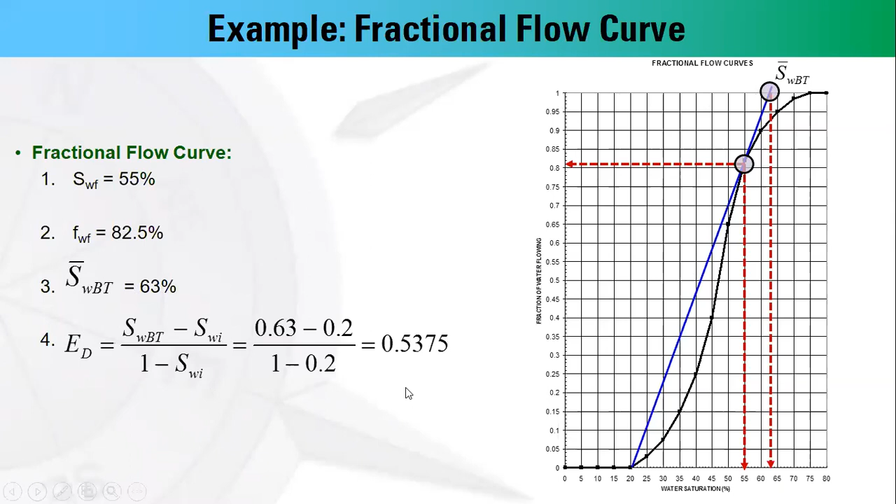In this example, the average water saturation at the flood front is 63%. So we can calculate the displacement efficiency according to this relationship, which is about 54%.

This is another example. At the end of this session, I'd like to highlight very quickly a case history of water injection operations. We have a specific field with this reservoir rock property data and the reservoir fluid data. We have a light oil reservoir.

This is the K-phi relationship, the porosity and permeability relationship. As you can see, we have 4 rock units or hydraulic units of this reservoir based on the relationship between permeability and porosity data.

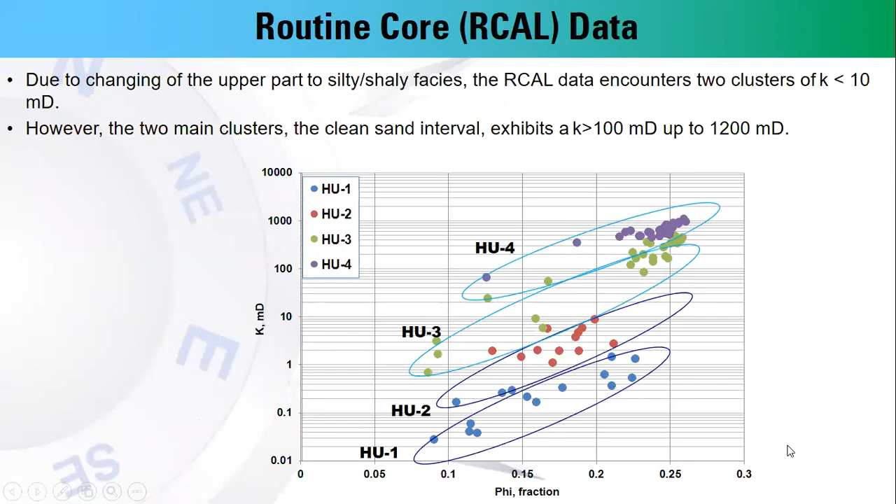The laboratory testing or screening experiments required for water flood are the capillary pressure, which is most important, permeability and wettability data, and also fluid and fluid-rock compatibility testing.

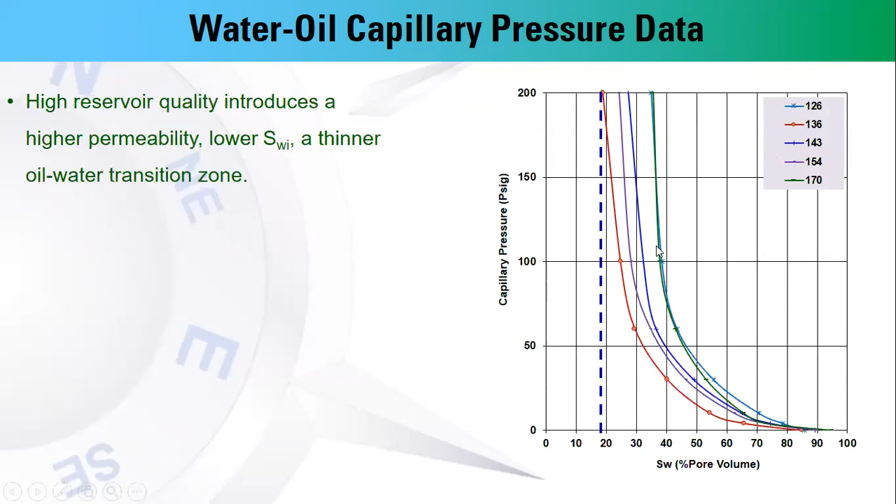This curve in green and blue is the average, de-normalized capillary and relative permeability curve that will be used for calculations of the fractional flow. This is the fractional flow curve calculated from the relative permeability data. So we have an average water saturation at peak flow of about 70%.

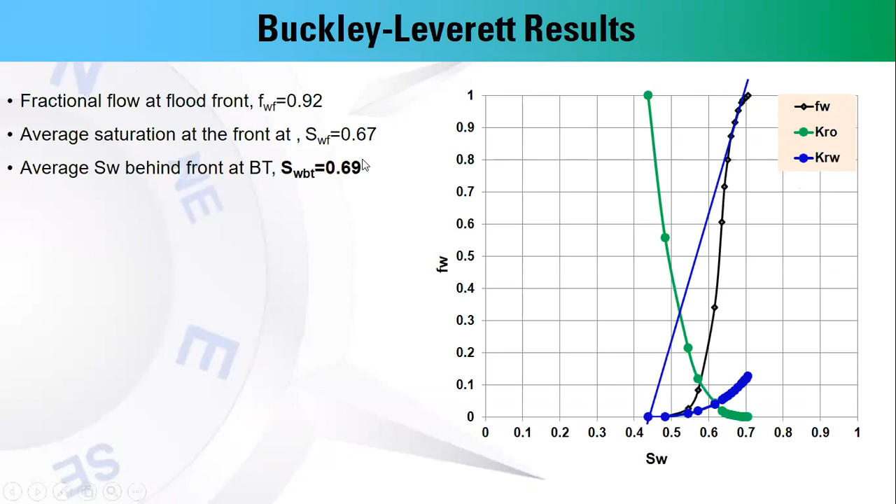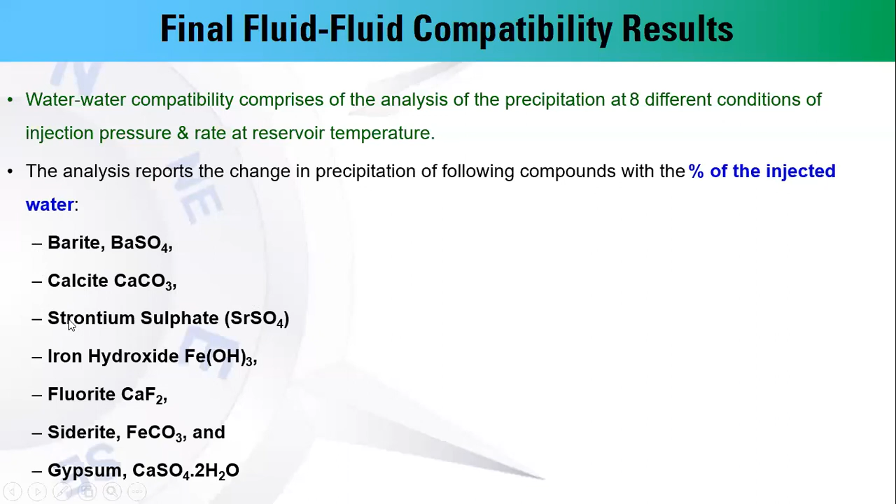For fluid compatibility testing, we have to perform compatibility testing to identify the precipitation of different scales like barium sulfate, calcium carbonate, and strontium sulfate, which are the most important scales that may precipitate during water flooding operations. This is the fluid compatibility testing.

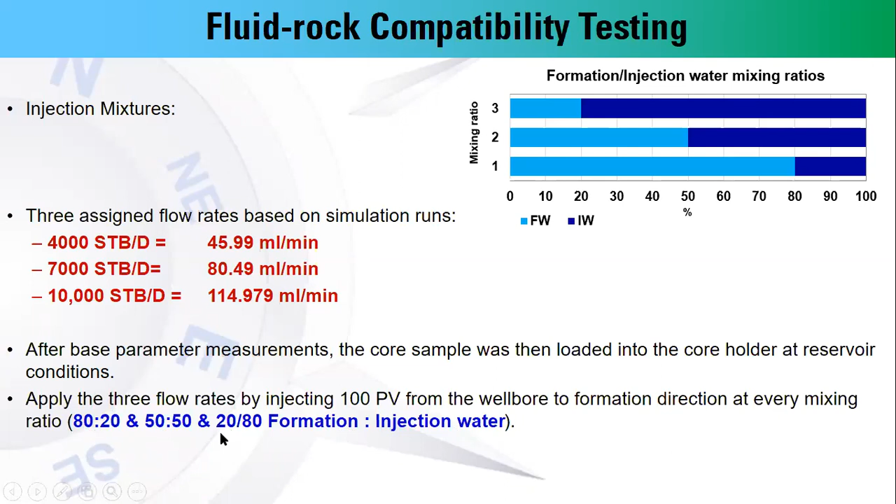Similarly, for other components and scales like strontium sulfate and ferric hydroxide, fluid compatibility testing involves injection or mixing testing between the formation and injection water at different mixing ratios and injection rates. We have three formation and injection water mixing ratios: 80 to 20, 50 to 50, and 20 to 80. This is the ratio between formation and injection water.

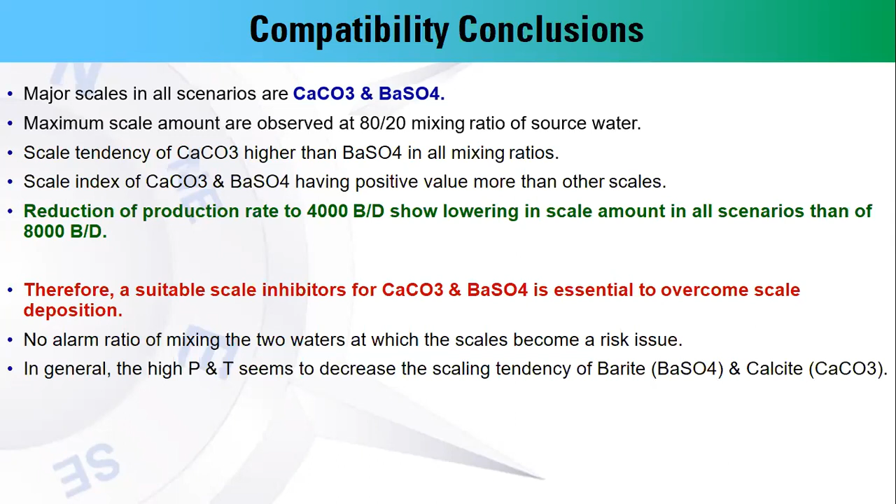Generally, damage less than 20% is acceptable. Damage can occur due to water flooding operations. So this is the compatibility conclusion. The most important scales are calcium carbonate and barium sulfate. In this case, we have to use specific scale inhibitors to avoid any precipitation of calcium carbonate and barium sulfate within the pore spaces during water flooding operations.

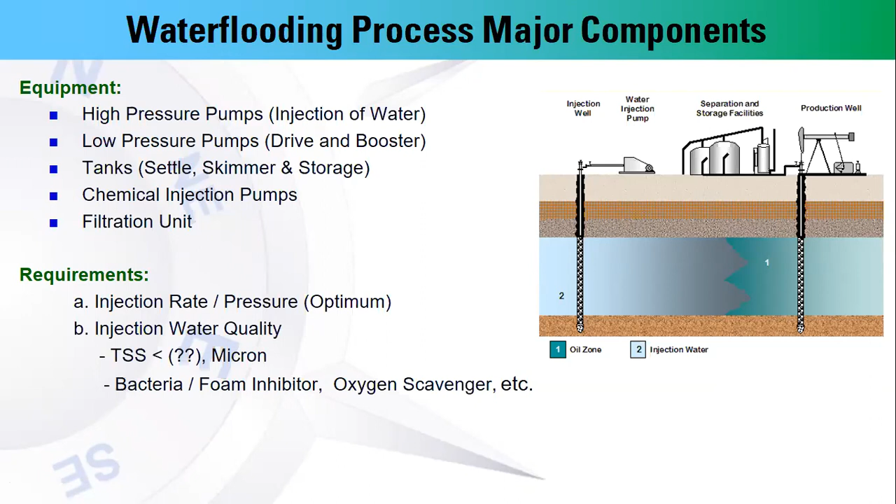For water flood facility and field operations, we have different equipment related to the pumping system: high and low pressure pumps, tanks, settling and storage tanks, chemical injection pumps for injecting the scale inhibitors, and finally filtration units to ensure higher quality of the injected water.

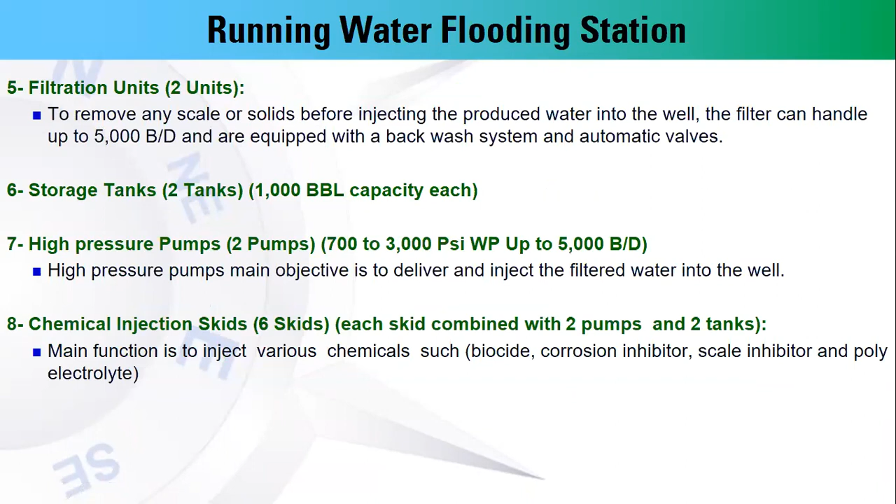This is a sample of the injection facility: pumping system, chemical injection skids, filtration units, and storage tanks. Most important is the filtration unit to remove any solid or suspended solids within the injected water, and chemical injection for scale inhibitors like corrosion inhibitors and biocides to eliminate the precipitation of calcium carbonate and barium sulfate in the subsurface reservoir.

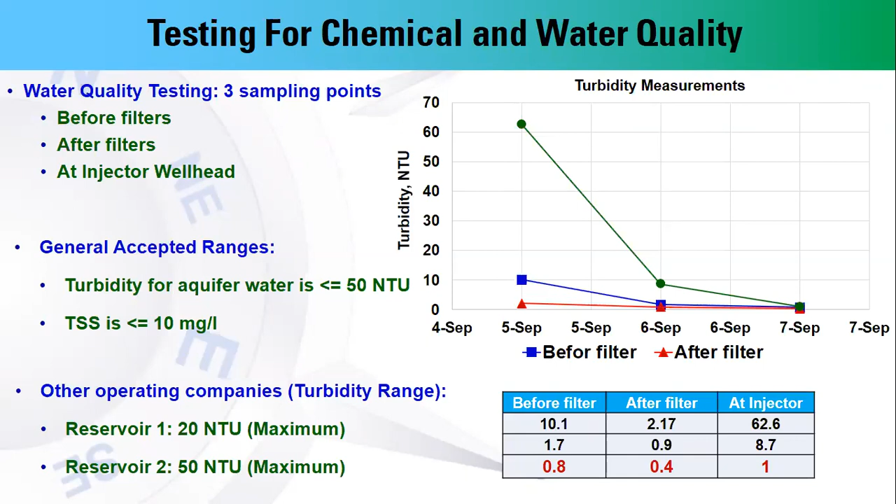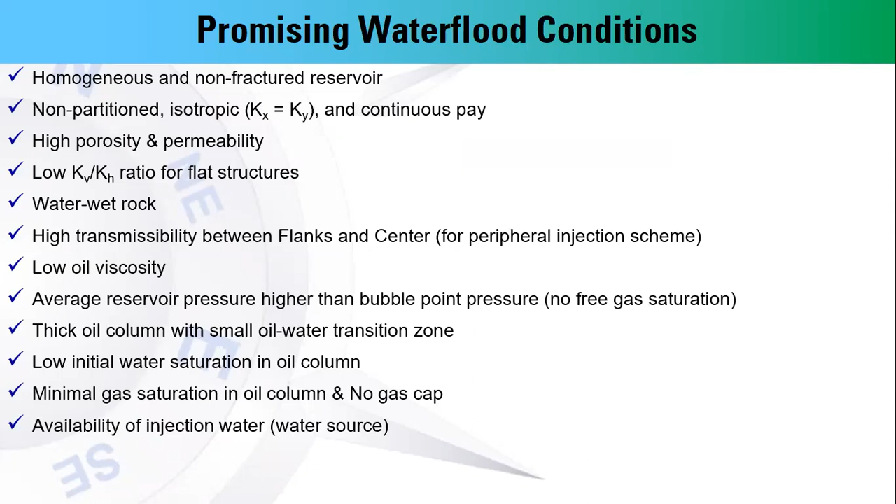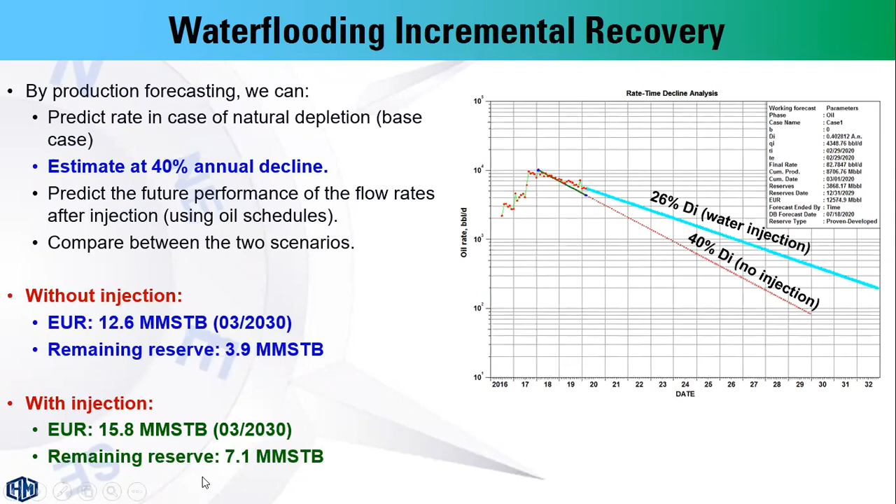Also, to calculate the incremental oil recovery due to the water flood, this is the difference between this scenario and this scenario. That's all I have. This is the conclusion of this session.

Water flood is a widely used secondary recovery technique. Reservoir heterogeneity is a critical aspect of water flood. Relative permeability and wettability significantly affect water flood performance. Mobility control is a very important issue to avoid early water breakthrough. Voidage replacement ratio is required to be higher than 1 to maintain the average reservoir pressure as high as possible.

For application of the displacement process or displacement theory calculations, we have to make normalization and averaging of the relative permeability data to apply the fractional flow calculations. Finally, water flood recovery is dependent on the oil in place at the start of water flood and the areal, vertical, and displacement sweep efficiency.